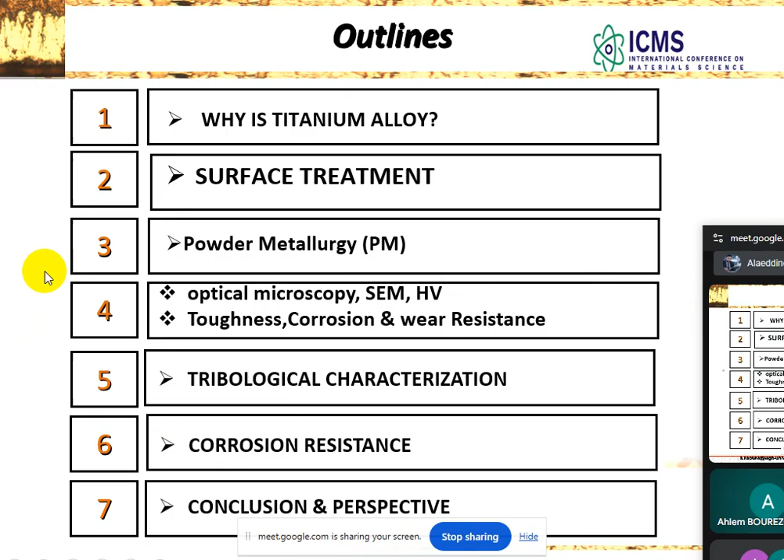So maybe you are asking why we are interested in titanium. Titanium, as you know, is a promising metal for its good characteristics. Titanium's density is between iron and aluminum. You can choose titanium for the low density, high specific strength, excellent corrosion resistance, very good fatigue behavior, and especially excellent biocompatibility.

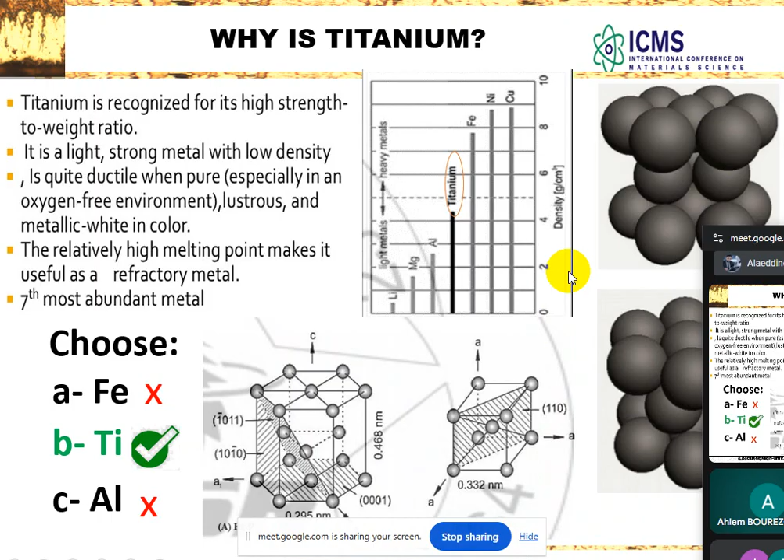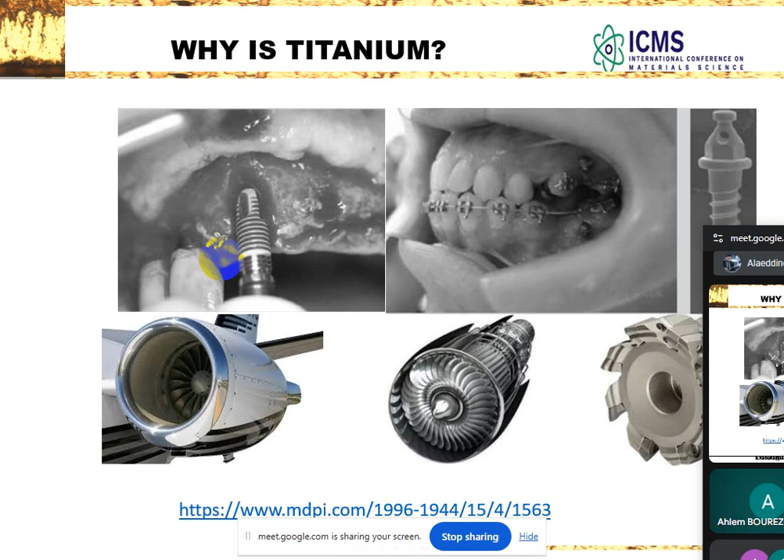For this reason, titanium alloys are widely used for dental implantation, and also aeronautics and aerospace. There are two big areas to apply this metal, and there are many more.

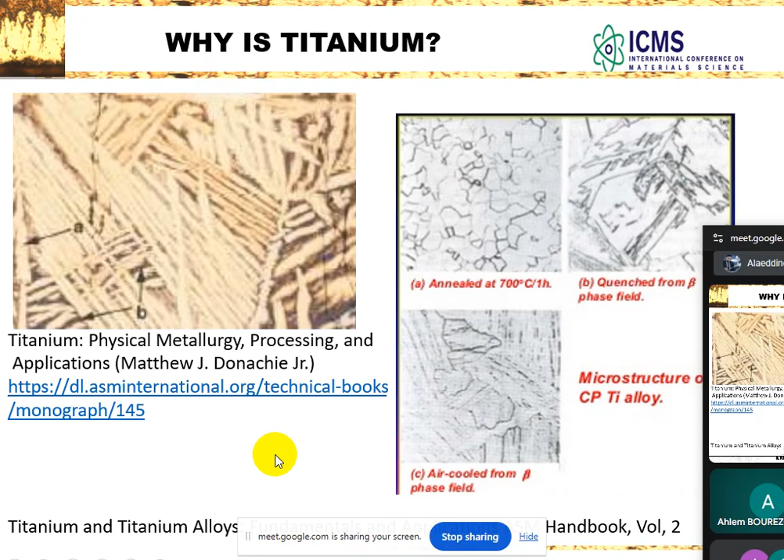This is the structure of titanium alloy after annealing at 700 degrees treatment. This is not my work, this is from the reference. You can check it or follow it.

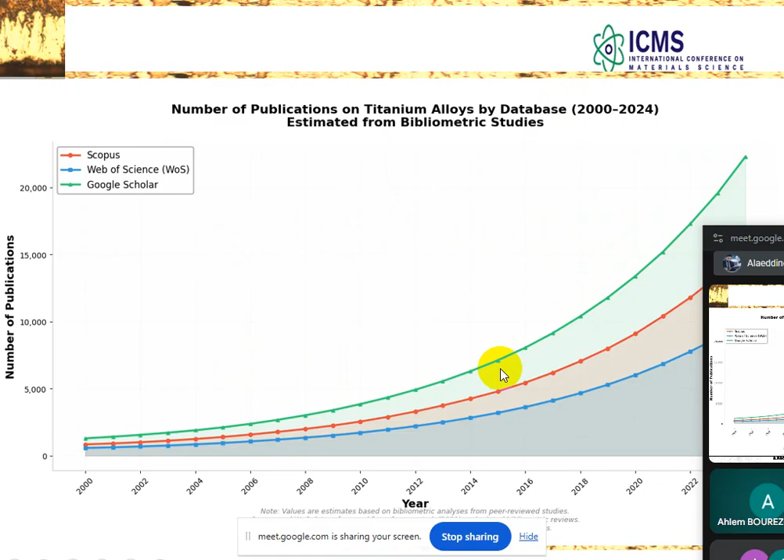For recent publications, there are many publications about titanium alloy. As you can see here, with Publish or Perish software, we have many citations on many papers for titanium alloy, and this is the increasing number of publications on titanium between 2000 and 2024, indexed in Scopus, Google Scholar, and also Web of Science. There is a high increase of publications about this.

The hot topics of trend are especially nanostructure, plasma-based surfaces, and bio and antibacterial surfaces. So we are interested in improving the surface of titanium alloy. You can click on Science Direct or MDPI to check other publications. So our work focuses on surface treatment with boriding.

Why are we interested in boriding? Because boriding, as you know, is a very important surface treatment, a thermochemical surface treatment in which boron diffuses into the surface of the treated material.

This material can be iron, cast iron, steel. We have many publications about this material. However, we focus on titanium alloy.

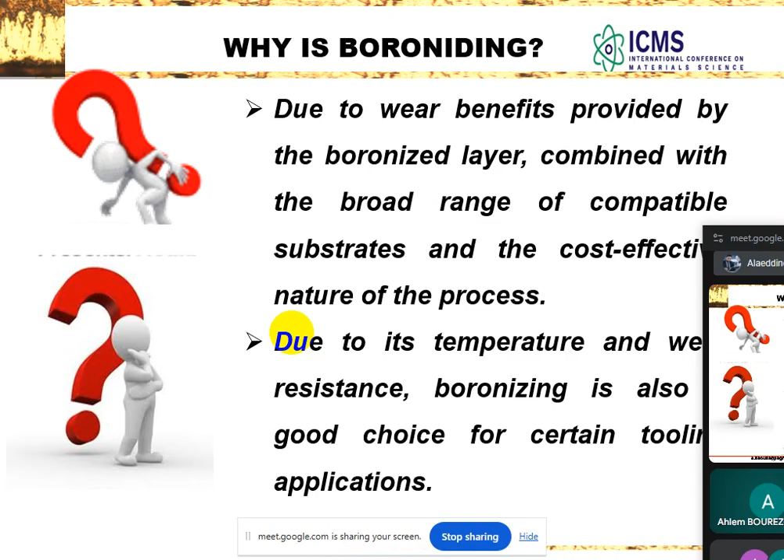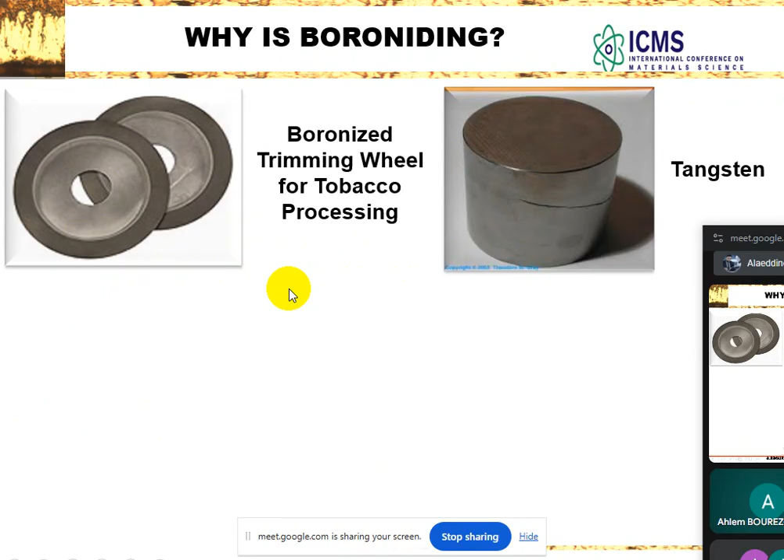That's a new treatment. Due to the wear-beneficial properties provided by boride layers, boriding treatment, due to its temperature and wear resistance, is also a good choice for certain tooling applications. For example, for wheels for tobacco processing, tungsten and pipe fittings, gearings, and many other applications.

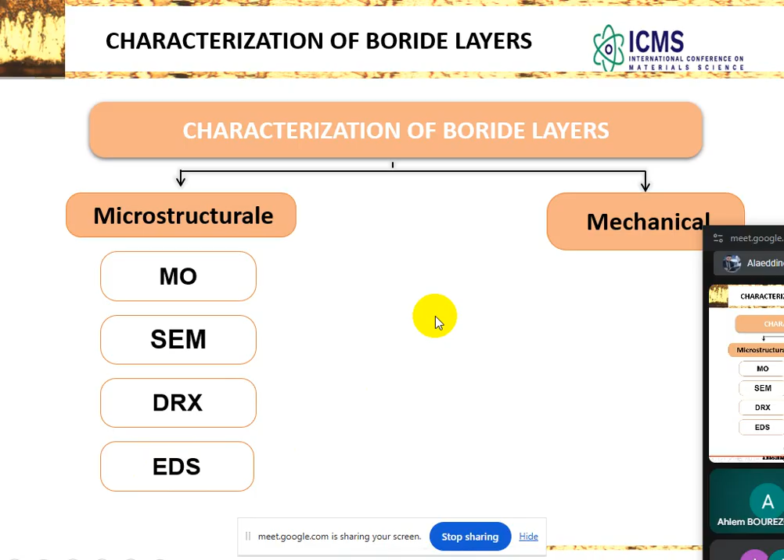Microstructure and mechanical characterization: optical microscopy, scanning electron microscopy, X-ray diffraction, and EDS analysis. As mechanical characterization, we have micro hardness and fracture toughness.

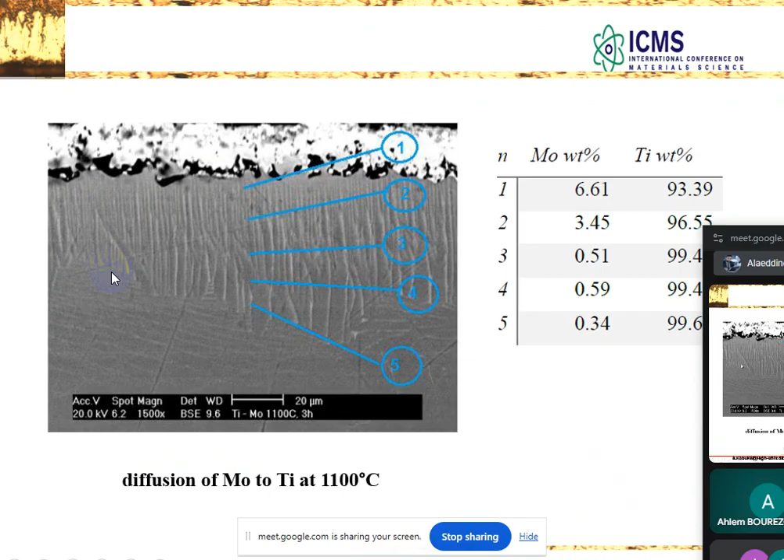So this is with SEM. This figure shows the diffusion of the boride layers that we have at different temperatures. This is the boride layers that we have.

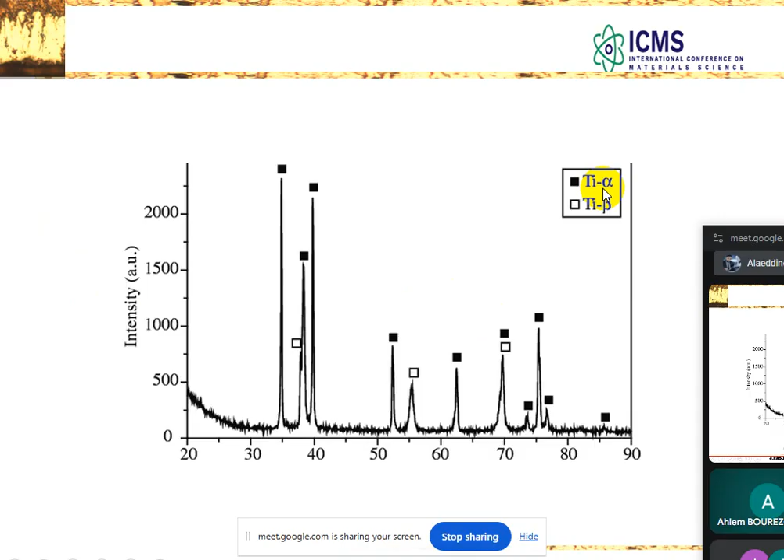For non-treated titanium alloy, as you know, we have only alpha and beta phases. After treatment, in titanium alloy we found molybdenum and boron in the composition. This is the boride layer.

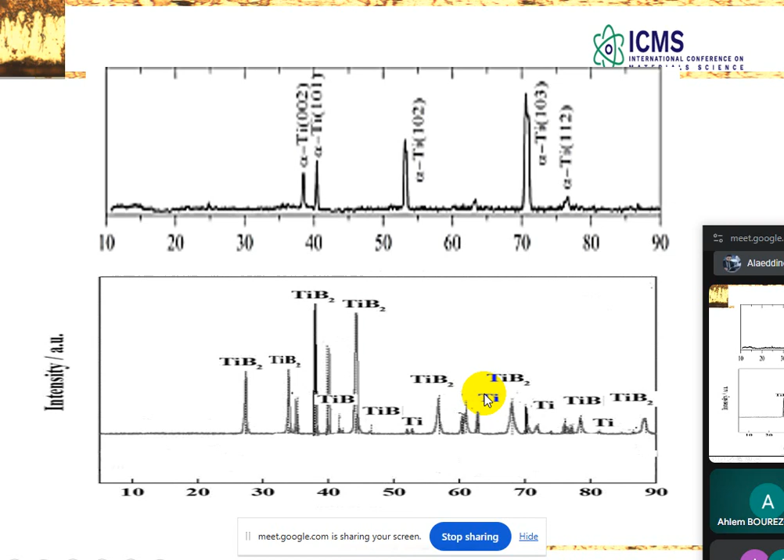This shows the structure of boride layers formed on the surface of titanium alloy. After that, we have TiB2 and Ti, titanium alloy, alpha titanium. So we have boride from this treatment.

We compare our results with old results, previous results that we have published before. We used carbon steel and stainless steel for boride layers.

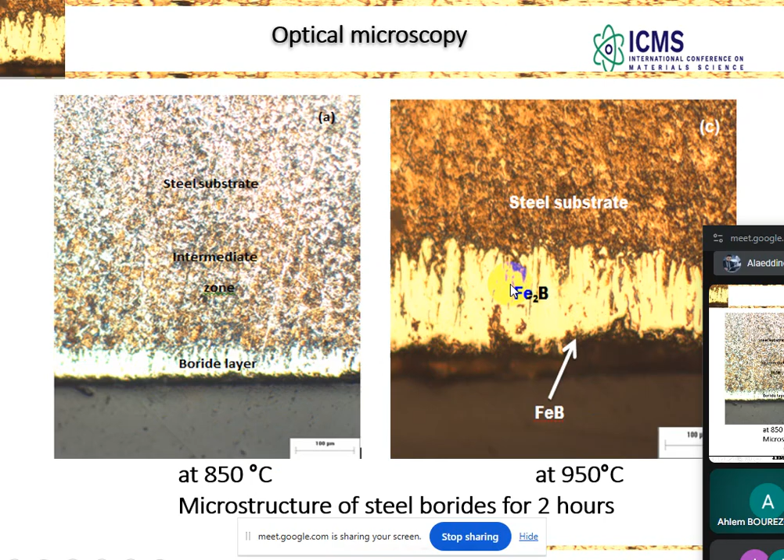This is intermediate, this is the steel, this is the transition zone, and this is the boride layers that we have. Down here is the substrate. So this is iron boride, and this is iron 2 boride, and this is the substrate.

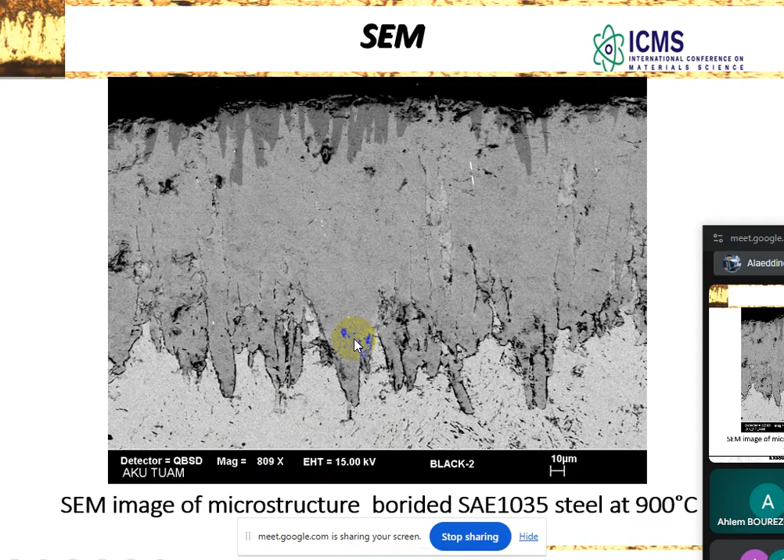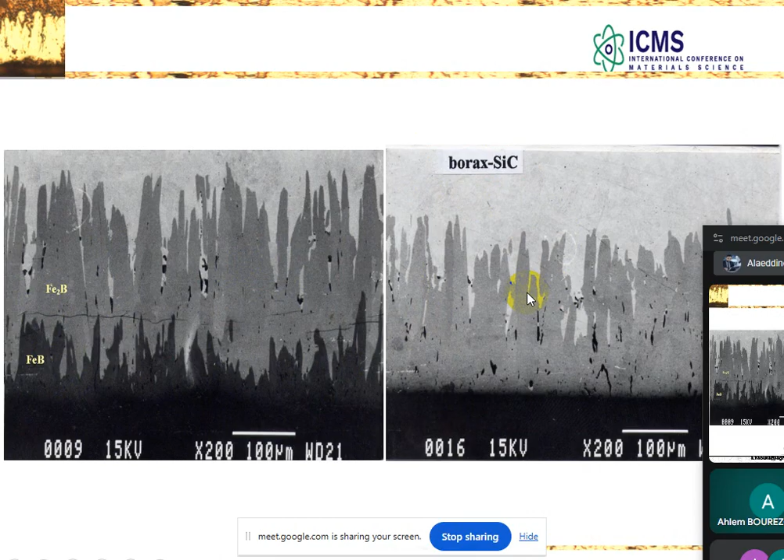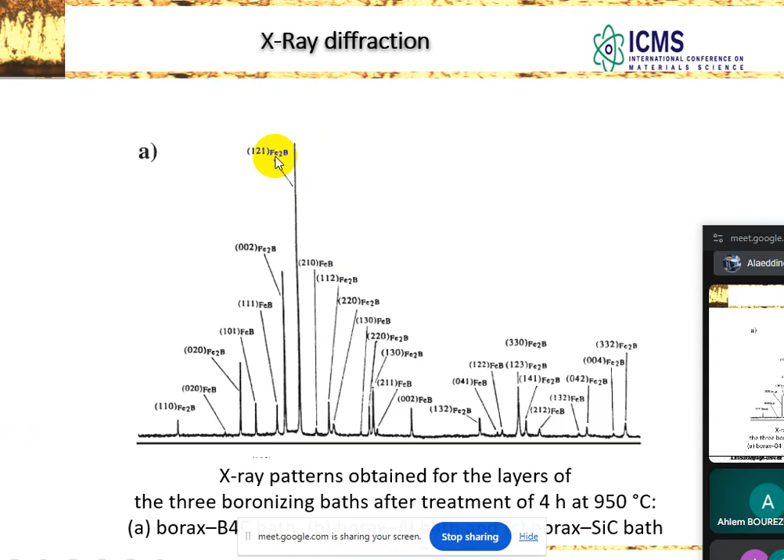This treatment for carbon steel at 900 degrees Celsius, and for boron carbide, we have biphase, double phase: iron 2 boride and iron boride. If you use only borax and silicon carbide, we have monophase, only one phase, iron 2 boride. We don't have iron boride.

This is the X-ray diffraction peak confirming the phases of iron boride and iron 2 boride at different temperatures and chemical compositions. After that, we try to measure the thickness of boride treatment. This is the traditional method, so we use a new method using ImageJ software, which is free and can be downloaded from the internet.

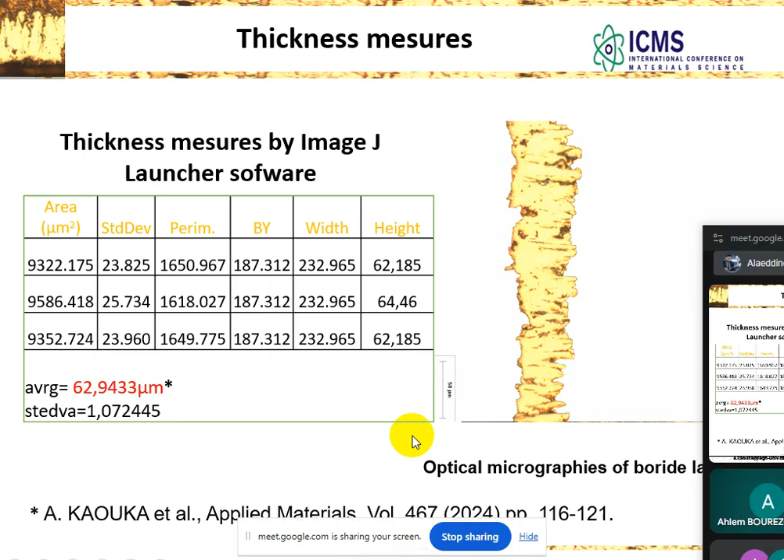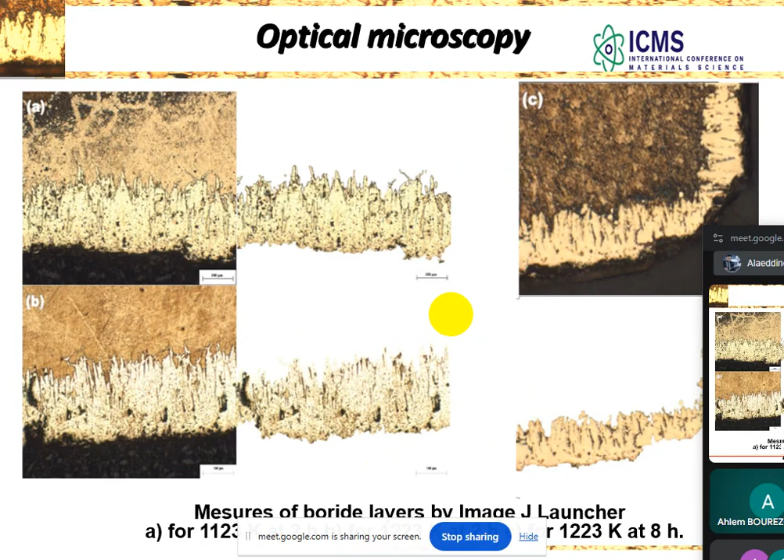We found that the average is about 60 micrometers, and this is old results that we have published before, ranging about 60 until 280 micrometers, which is a very important thickness.

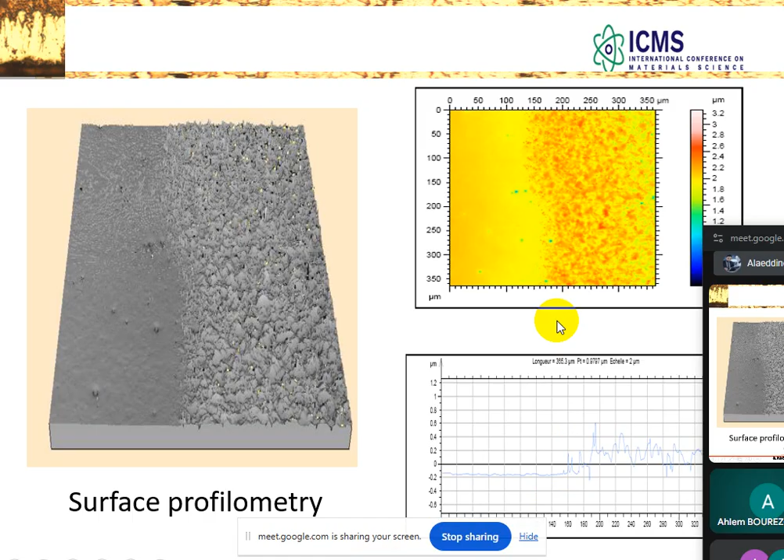After that, we have the surface profilometry. On the left side, we didn't achieve the treatment. However, on the right side, we achieved the surface thermochemical treatment, and we have this profilometry of the surface to find the length of the boride layers.

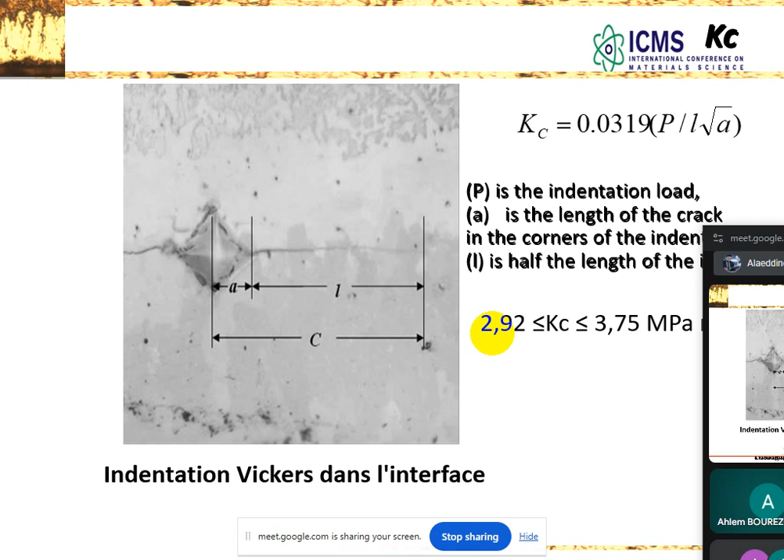We also measure the toughness and micro hardness of boride layers with this relation, and we found it is about between 2.92 and 3.75. For the friction curve, this is the first phase, second phase, and the third phase for the friction phase.

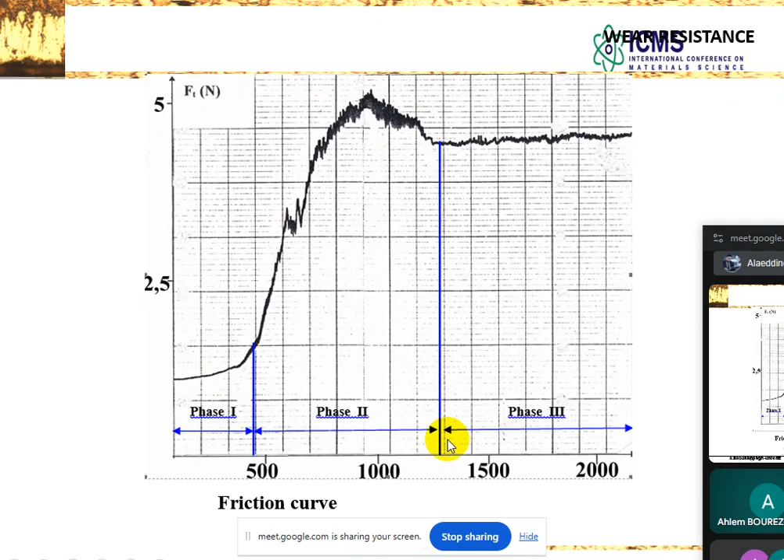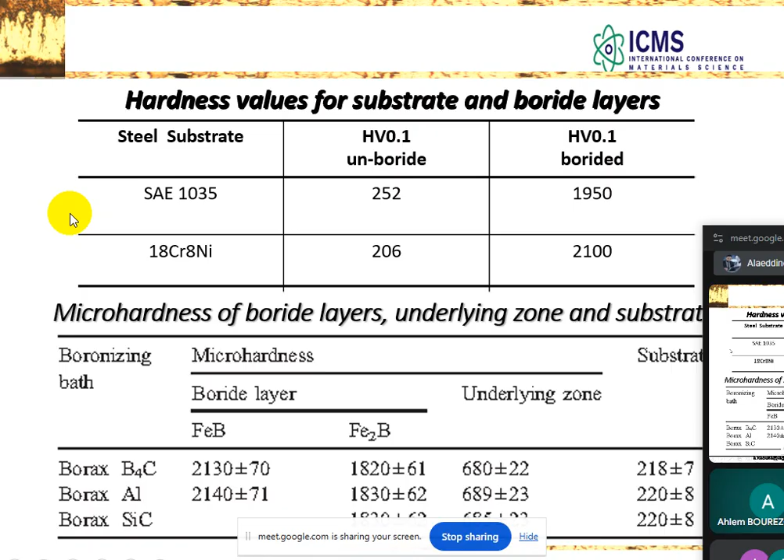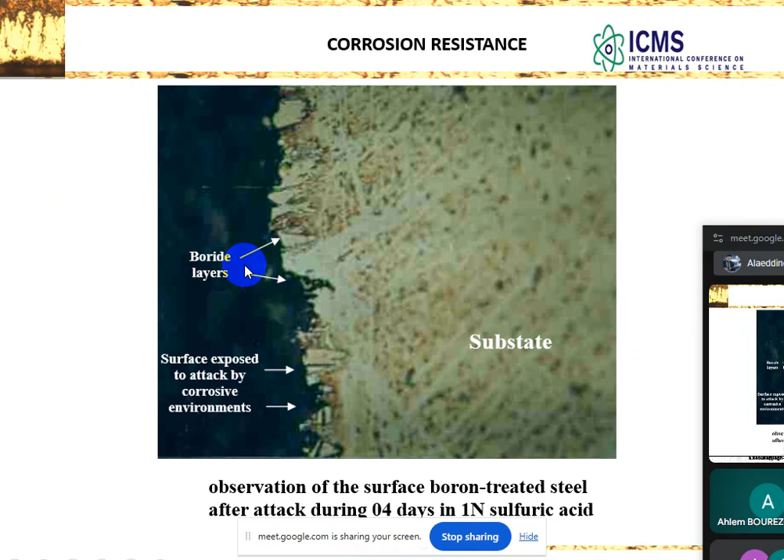These are our results about iron boride and iron 2 boride micro hardness. Then this is the boride layers when we attack with sulfuric acid to study the corrosion. We observed the surface boron treated after attacking for about 4 days in sulfuric acid. This is the corrosion produced, so there is no effect from the corrosion environment.

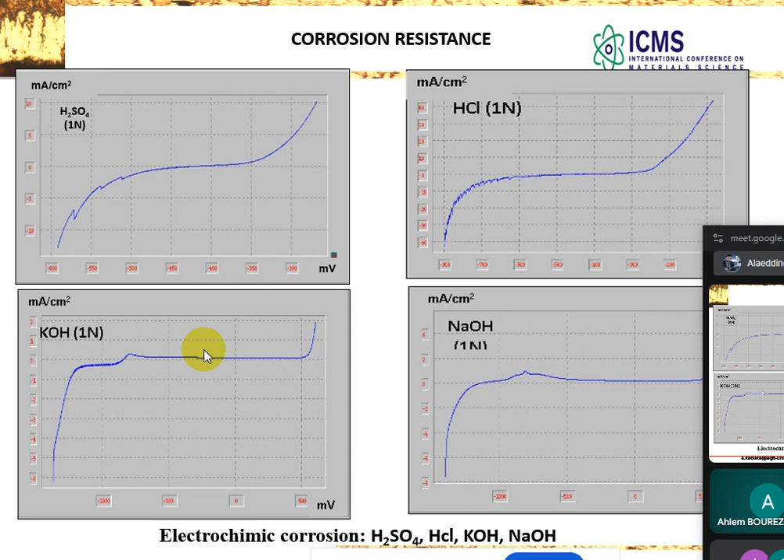We have also studied, it's a long study, so I try to summarize electrochemical corrosion in sulfuric acid, NaOH, KOH, and HCl, and the results that we have.

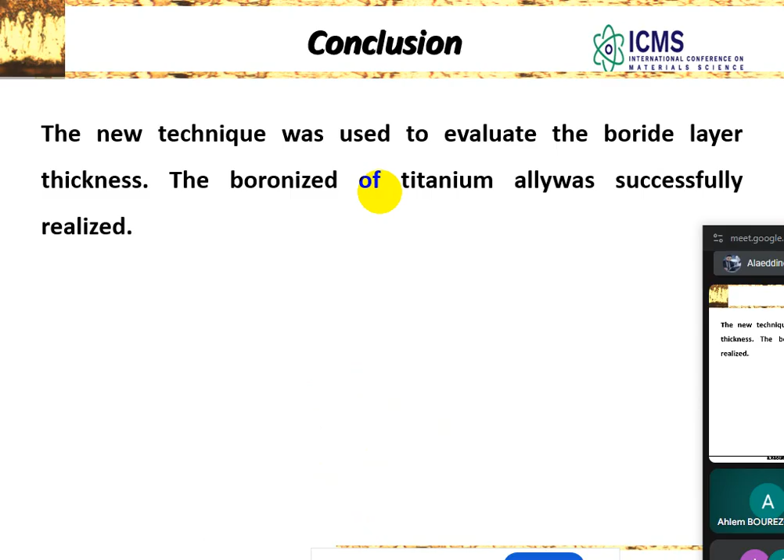So I will conclude that the new technique was used to evaluate the boride layer thickness for titanium alloy, successfully achieved. It showed the sawtooth structure with a length of about 200 micrometers, and the micro hardness was about 1170 to 1870 HV, with fracture toughness ranging between 3.9 and 4.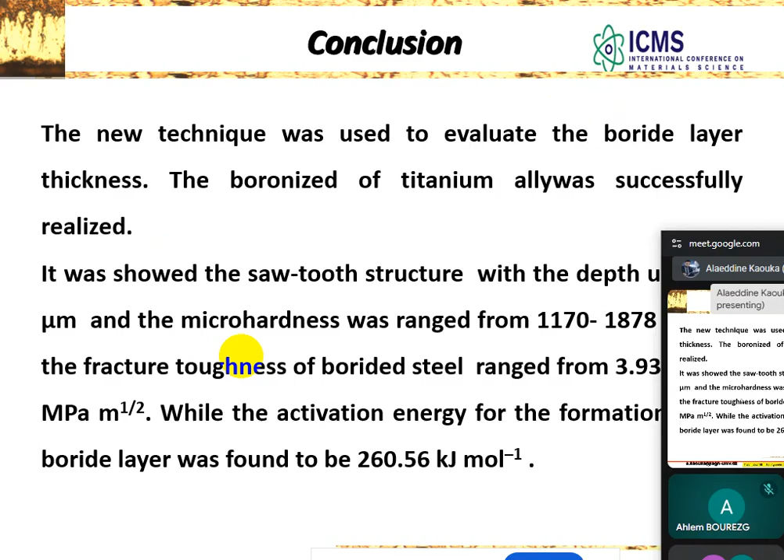And 4.48. The activation energy, sorry I didn't give details about this, the activation energy is about 260 kilojoules per mole.

So the abrasive wear resistance of the boride layers was approximately 4 to 5 times greater in comparison with the untreated one. The results under dry conditions show that the boride revealed higher wear resistance than the bare steel, and the coefficient of friction value was lower than untreated.

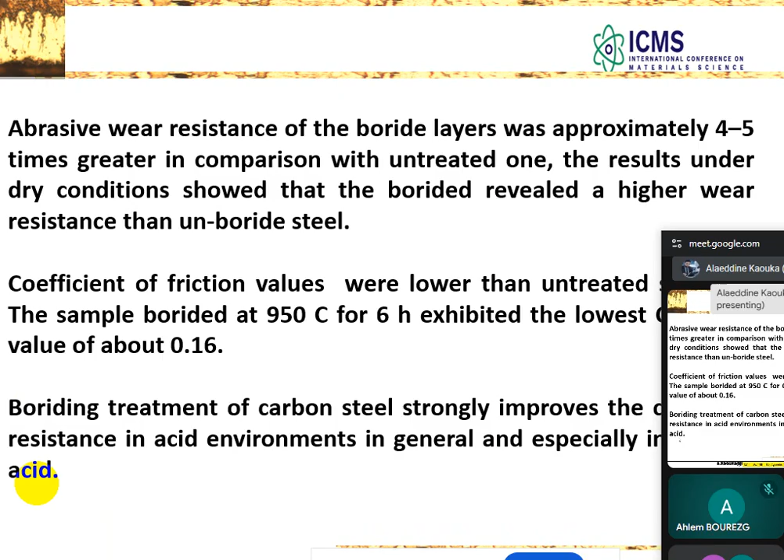It's about 0.16. So finally, we can say that we achieved titanium alloy treated and processed by powder metallurgy using blended elemental. Their microstructure changed into titanium, and this affected their mechanical properties.

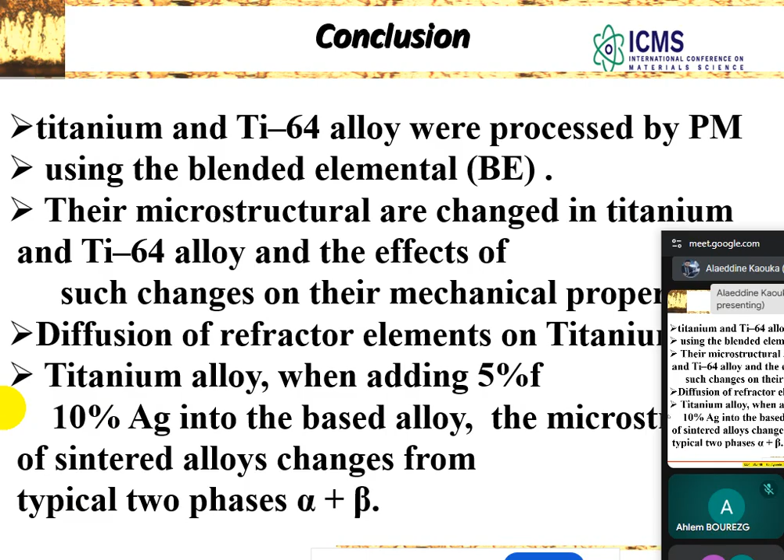We improved some mechanical characteristics such as the micro hardness, and also the chemical characterization and properties such as corrosion resistance. That's all, thank you for your attention. If you have any questions you can ask me, and if you want to collaborate you can contact me with my email below.